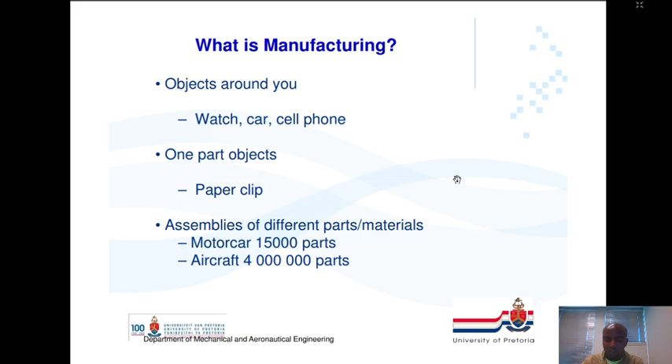In the beginning of manufacturing processes, at least structured manufacturing processes, you can think of the time before Industrial Revolution 1. There were still manufacturing processes, and that is why we had to come up with a structured way. That's when we entered Industrial Revolution number 1. Now we are at number 4. You can read about that.

Every part made by various processes undergoes manufacturing processes. It's manufactured. Basically, we are converting raw materials into products. If you can have a higher level of manufacturing, the standard of living is going to improve.

Think of how we can travel around now. We are able to manufacture airplanes, and for that it's easier to travel. But in the past, you had to walk from here to Malelane, or from here to Cape Town, or from here to everywhere on land. We could not even go into the water and into oceans. Today we can travel across the oceans, through the oceans, or over the oceans.

But really, manufacturing is the backbone of a healthy economy, and a healthy economy is what keeps us alive. If you go and find the parts and puzzles of the economy, you're going to find that manufacturing plays a very huge role. Remember, manufacturing is not only from engineering, as I said. That's why engineers are needed, but you can also have a situation where you require other people, like artists.

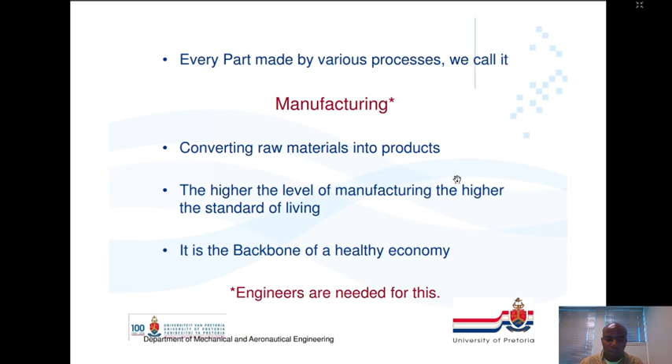Let's say you have to manufacture a plane, a finished product, a plane. You need it to have an interior designed, which you don't need engineers for, but you need artists. Each person contributing to a product will add a particular value to that product.

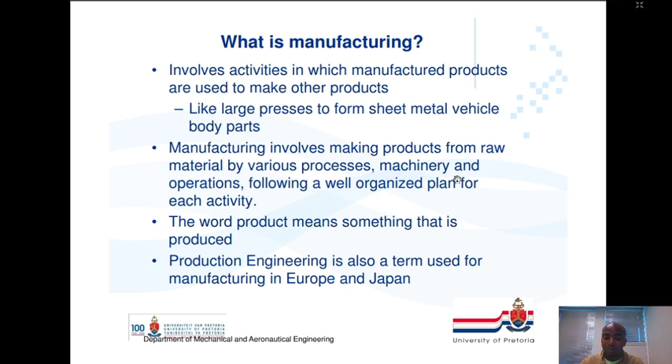Okay, let's move on. What is it? Like we said, you can have large manufacturing processes, you can have small manufacturing processes. The word product means something that is made or produced by some processes. And production engineering is often used in the region of Europe or Japan to refer to manufacturing.

Manufacturing is a complex activity. I just mentioned an artist coming to design an interior of a plane. Think of their requirements, and you need a whole lot of resources to work together so that they can produce products that are helpful. Think of it: support services, purchasing, process planning, shipping, product control, product design and development, marketing, sales, even manufacturing itself. You need resources, materials, capital, energy, and people. They form an ecosystem of manufacturing.

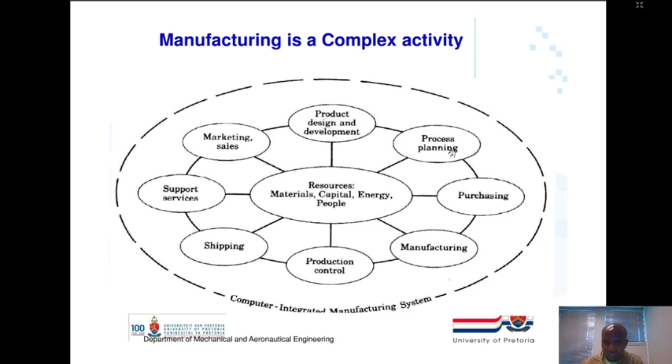Here you can see manufacturing must adhere to the following aspects. You need to have design parameters and you need to have specifications. What are the parameters and what are the specifications? If you need to jump 1 meter and want maybe a spring product that can help you achieve that, you need to indicate that this product needs to achieve a range, and if it's in meters, height, or length, you specify that. Those are specifications. And parameters: it must last for so many years, it must use this type of material. The design parameters and specifications actually talk about more or less the same thing.

It must be produced in the most economical manner. You don't want to be wasting time and wasting resources producing one thing. If you can produce this pen in 1 minute using 100 grams of material as the optimum, let it be like that. Don't find yourself in a position where you have this huge pen when you could have done it using less material. Time constraints are what we are constantly looking after.

Budget, you are constantly looking after that. That is project management. Quality must be built into a product. This pen, or this pencil, must last for quite some time, and for that you need to design things in such a way that they last. You don't want to have a pen that, I'm thinking of those pens I usually encountered at some point in my life, where the pen wouldn't write even if it's new. It is frustrating, so there's no quality there. You have a pen that you don't know if it's going to write or not. That type has no quality. But you can also see with the pricing on that pen that, okay, here we have a problem.

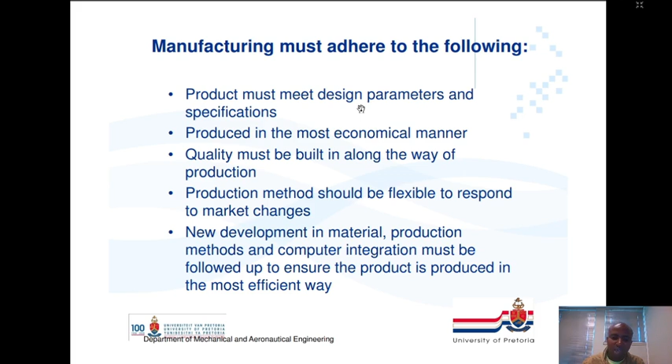New developments in material production methods and computer integration must be followed up to ensure the product is produced in the most efficient way. This links back to the economical way. Same thing.

Manufacturing organizations must constantly strive for high productivity. That is business now. Optimum use of all its resources. People should be on par, machines should be well maintained and running well. We need enough energy to produce; machines should be provided with energy, electricity, just as we need food. So when speaking about manufacturing, we've already touched on the agricultural space, where manufacturing also goes on. It plays a role everywhere there are products.

We should always look at the greater scheme of things. This brings in things like environment, the planet, safety. Politics gets involved here too - job creation, sustainability, having products that can be sustainable. When you manufacture, it's no use making a component that won't be purchased because you didn't look at the greater scheme of things - is the customer willing to pay for it? We'll cover a lot of these things later in the module.

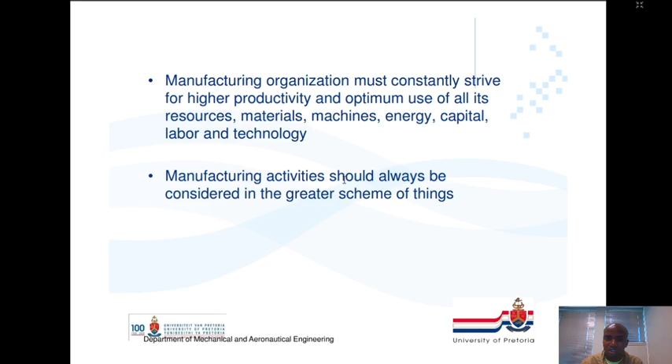Example: the paper clip. Think about it. Paper clip design - the material, should it be plastic or metal? You know which one to use depending on the application. How thick? What mechanical properties are we looking for - strength, stiffness, the shape? The shape also tells you if it will work. Think of a spring - initially it was just a wire, but once you put coils into it, it performs a different function. That's where shape comes in.

Think of a plate - this page here, laminated or something. If it's flat and you pour water on it, it will go everywhere it wants to. But once you shape it, you can pour water here and direct it in this direction - pour water here and get it over there. That's transportation, that's piping.

Another way of thinking about it - transportation of fluid, just an example since I want to stay general. Surface finishing - depending on whether you need a smooth or rough surface. Think of a tar road, what you need there depending on the application. Think of a piston - it has to be very fine because with the cylinder and piston, you don't want leakage from roughness. Some things need fine surfaces, some need rough, depending on application.

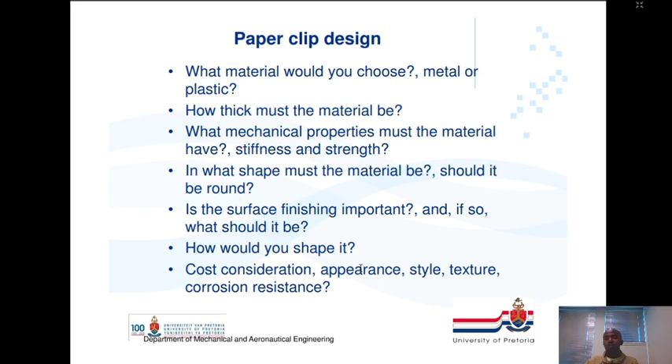Shape - we spoke about it, and the method of shaping it. What shape is it and what method? Cost consideration, we just spoke about it. Style, texture, corrosion resistance - those types of things.

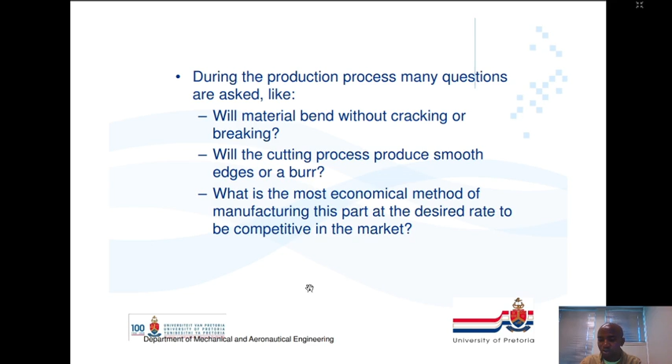During the production process, many questions are asked - these are not the only ones. Will the material bend without cracking? These questions are from a mechanical point of view. Will the cutting process produce smooth edges or burrs? What economical methods can we use? Who's going to buy this? How long will it work? Can we dispose of it safely? What is the impact on the environment? How safe is it going to be? How sustainable, maintenance-wise? Those types of things.

Another example, transistor. Here we are speaking about small things, very small things, microns. We are speaking about the thickness, less than the thickness of a pencil, and you still need to be able to touch on those. So there are processes already. We are at the microscopic level here, electrons.

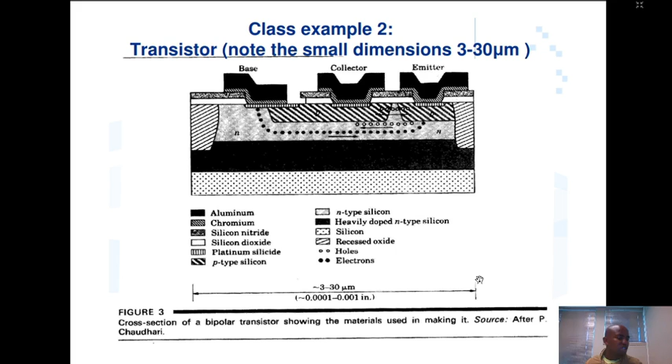Of course, the other requirement why phones are decreasing in size is because we want to carry them around, and at some point we had to have them all stationary like this one, because we did not have technology. They were supposed to be connected to function, but now we have phones that can work without connecting them to a physical wire. That's good.

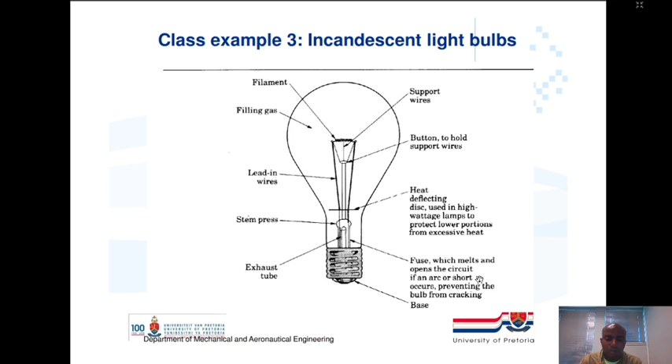A bulb, we all know bulbs. A lot of processes have gone through that. So products like this, you don't think about them in such greater detail, but they are actually products formed from manufacturing processes. That is the process, how you would go around it. There's automation of how this is going to be achieved. In the past, probably we first had to use our hands to connect them. Currently, probably you don't even touch the machine which produces this. You only touch the light.

And thinking about it now, you might be in a space, or we might actually soon be in a space where this product we will only touch when we have to install it in our homes, or when we take it from the delivery guy, or it might be delivered by a car or a robot or a drone. Those are the processes. They make our life easier, and then we touch it when we install it. If you are lucky and you designed a robot in your house to help you with a few things, you will maybe have a robot that will install it for you.

If it can be produced from, let's say, the material used here was mined, we might be in a situation where the products are mined and then undergo a process, and then we deliver them to a factory where some of the components are produced, and then we put it on an assembly belt, all automation, and then the next thing we package it automated, transport it automated, and install it automated, something like that. When we dispose it, we could get to a point in life where we don't even have to touch it after disposing. And recycling processes.

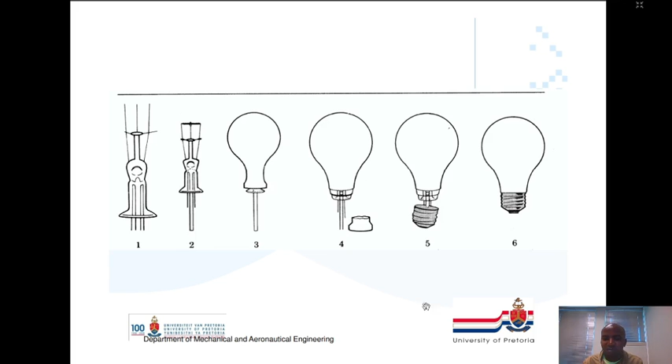So there we will speak about safety of the design, safety factor. So you design something thinking of the day in which it might encounter a bad case scenario. It must operate still.

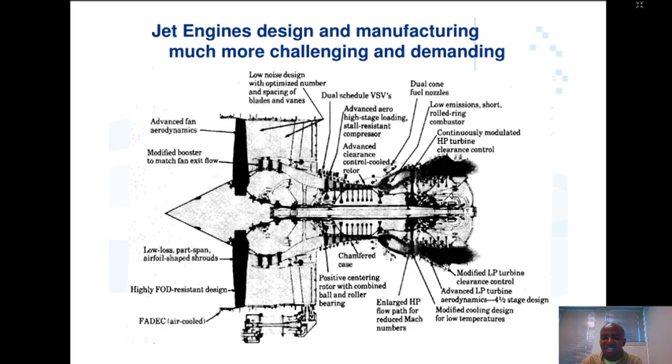Design for manufacturing. You need to have a design and manufacturing process which you can iterate. So it mustn't be a standalone type of thing. You must have a designing phase and a manufacturing phase, which you can check against each other.

But we are constantly doing this, if you realize, because initially you will have a car that can do 100 miles per hour, or 100 kilometers, let's use kilometers per hour, and after you touch there and here in the design, that car can now do 120, something like that. You should never separate the two, they should work together. Sometimes manufacturing engineers are called design engineers. So you must think about it along those lines.

You must meet the requirements. Imagine I say design for me a pen that can last for 2 weeks if I write every day, and then probably I tell you how much I write and that type of thing, and you give me something. The reason for that is because maybe I spend 2 weeks in a place where I'm far away from getting a new pen, and then you go design something that will last me a week. That's gonna frustrate me.

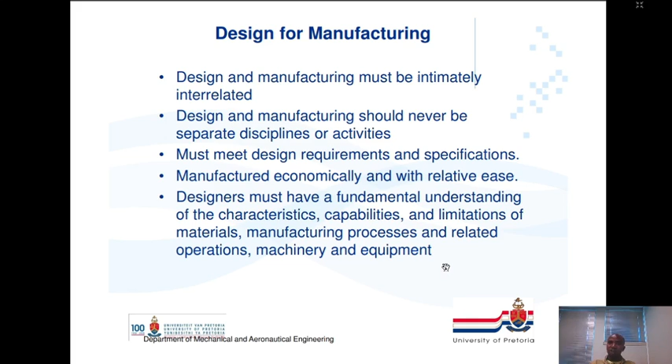Otherwise, if it's going to be used by somebody at your age, tell them that don't do this. If you do this, this is going to happen. And then you confirm that you received that information, then you go on. Basically, that is what we get in the industry. You will be told what to do and what not to do, and then you sign saying that I received this training and I'm going to do what I have to do and not do what I don't have to do. Okay.

The impact of engineering. Okay, some of the things I'm going to repeat here. Safety, assembly, production cost, and society, that type of thing. We don't want to design and build something that is going to affect our lives negatively in society. We are in South Africa. One of the things that we have is, I think it's a global problem actually, adapting to technology. Maybe if we do adapt to that, we might in a process have people losing jobs. As one of the things, the impact that you might have, you need to keep in mind creating jobs.

And there's a lot of things that we can talk about when we're saying impact of manufacturing, which we must keep in our heads when we do the designs.

Okay, now computer aided design, manufacturing, and process planning techniques are now powerful methods that we have, which we can use to help us in the manufacturing processes. Remember, we said this at the beginning: you need to be able to do rapid prototyping. If we have computers, we can visualize what we need, and then if we can go produce the exact same thing that is designed in the computer, we can have a prototype.

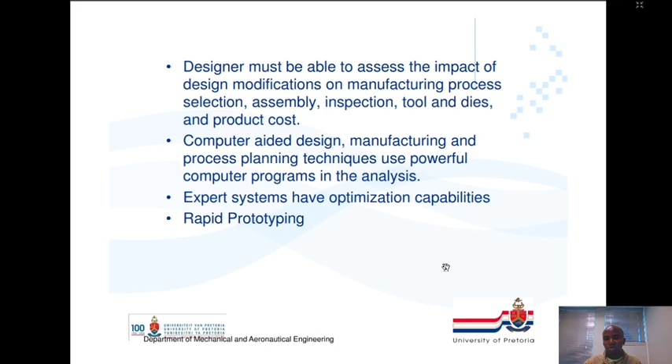Now, when we invented a measuring tape or measuring equipment, we started by having a stick as our measuring equipment. So we say this is a stick, we cut you the same length of stick to go manufacture with it. At least we were trying to get control. So, rapid prototyping.

The layout of a typical manufacturing process from the mechanical point of view: design process, selection of material, selection of manufacturing process, assembly line, product quality, automation, and the impact of computers. These are developments, and in the layout, of course, economics and manufacturing, organized for manufacturing. This layout is not step by step, so you might find that economics of manufacturing will take place somewhere in selection of material, because you want to select economically the materials you want to use based on the requirements.

Say you want something that will break after use, each time after you use it. Do you know that a fire extinguisher, if you break the seal, it's broken? So you need to break it so that you can use it. Otherwise, if it's sealed, it means it still has something. So that is the process and control over that. You need to break it and use it, and then we know it has been used, and then we refill it, or if it has some, we can reseal it or something like that.

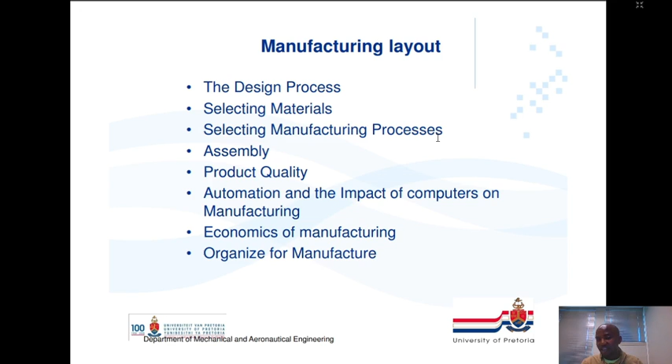You don't want to go and use a very expensive material for that, because you know that part of it is to break it for use. Somewhere else you don't want things to break, therefore you will not go and use a cheap, low strength material.

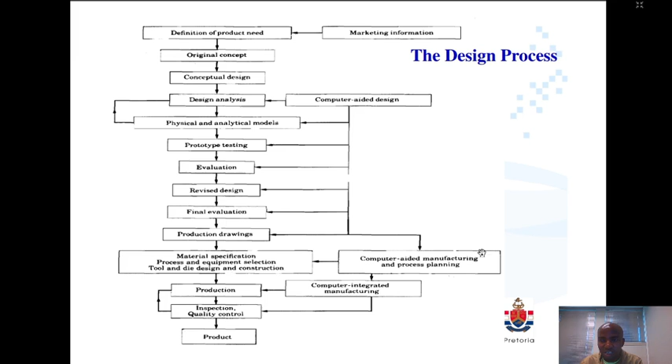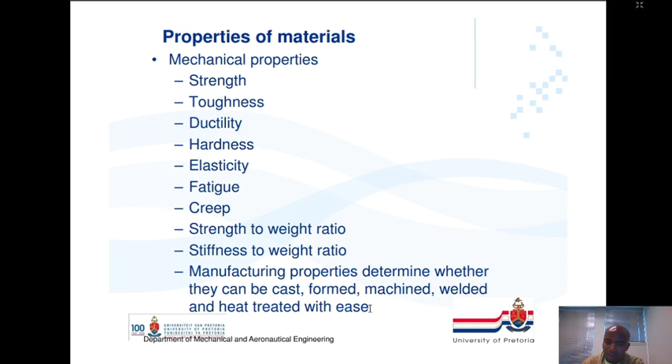Properties of material don't end here, they keep coming as we actually go into understanding material better. You have strength, toughness, ductility, hardness, elasticity, fatigue, creep, strength to weight ratio, stiffness to weight ratio. Material properties determine whether the manufacturing process can be cast, formed, machined, welded, or heat treated. I will teach you a lot about this in this module, so just keep that in mind.

Casting - we have the expendable mold and permanent mold. Don't worry too much about it, I'll go into details with that. Forming and shaping - we will cover machining, joining, and finishing operations.

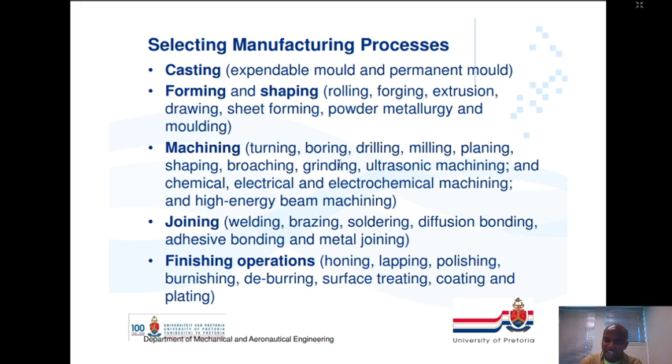And because it's from a mechanical point of view, just understand that I will be giving examples from a mechanical point of view. Dimensions and surface finishing - I spoke about this a lot.

Operational and cost consideration is very important. If this thing can be maintained - imagine having a car that you cannot maintain. Once it's broken, it's broken. You cannot substitute the parts, stuff like that. So you might spend a lot on cars each year after you have a breakdown. So you want to have simple things like tires. We know they get messed up very quick depending on how you drive, but you can replace those.

And then as part of manufacturing, you need to standardize things so that you can interchange them. This is why, when I was giving an example about measuring equipment, we started using sticks, then we invented measuring tools like that. Availability of machines - you need to know if you can manufacture this with which machines, where can I get those machines, number of parts to be produced. You need cost consideration. If you can automate your process, it's fine.

Tools and dies are very expensive. Sorry about me jumping up and down, but you need to consider these components. Be considerate about cost and operation.

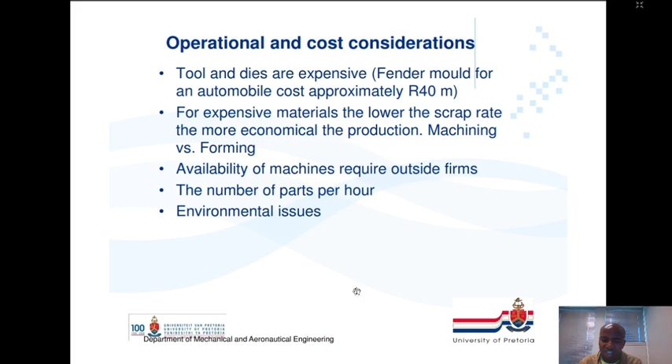When you design, you must design for assembly. Imagine you have a car that you don't assemble—it's complete like that. You don't want to need to break it down by cutting it with a grinder or something; that's not an ideal way of manufacturing. You manufacture and design for assembly so that you can break out parts, bring plastic and attach it to metal somehow, and attach electronics to mechanical components, that type of thing.

So put that: permit assembly with relative ease, and the possibility of designing multi-purpose parts. If you can interchange parts, it will be very nice.

Imagine each car model has a tire, but that tire can only be used on that particular car—it's not really nice. You want to be in a position where, if it's an identical model, design and everything, you can interchange some parts.

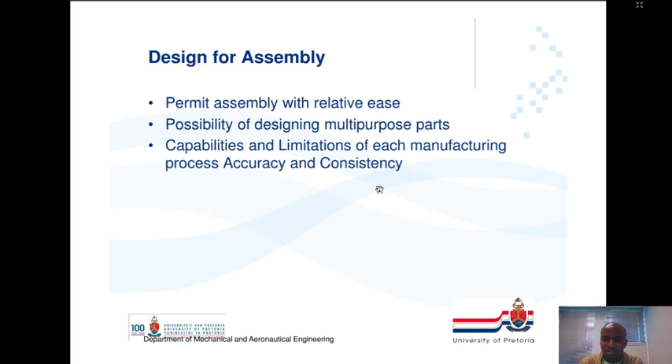Capabilities and limitations of each manufacturing process, accuracy and consistency—that is also going to be very important. We are going to touch on that. Assembly, look at this.

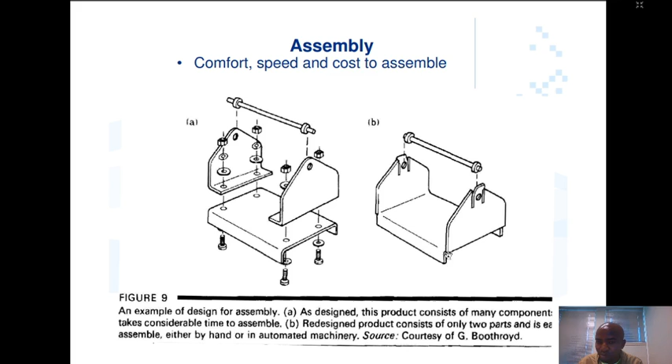We initially had this using number A. We can achieve the same thing using number B, but these are different manufacturing procedures. If you don't have a procedure that can achieve this at a go, and you have a procedure that can do this instead, then you are forced to follow this method, and this can be a little bit expensive depending on the cost of each component. Even here it could be a little bit expensive, because maybe the machine that you use to form this is expensive.

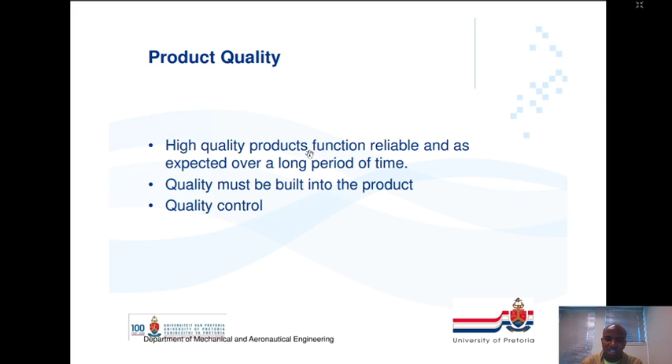Product quality. Quality has something to do with how satisfied you are after using something. High quality products function reliably as expected over a long period of time. Quality must be built into a product—we spoke about this. Quality control is very important.

Automation and the impact of computers on manufacturing—this is something we cannot avoid today. Major goals: integrate various operations to improve productivity. Remember, computers don't make silly mistakes; 1 + 1 cannot change, and they can do that repeatedly over a million times within a short period, counting from 1 to a million.

Think of those machines used to count how many notes you have. They probably even take information—the machine goes through and is able to detect even the numbers on the notes. It's able to count how many notes there are and which note corresponds to which number, so it can record the numbers and the count. Think of that process—it's quick, happening within a minute or so.

Minimize cycle time, reduce labor costs—basically, if we could get to a point where this is achieved, we would all be happy. But this is where politics come into the picture, because you need to think about the social impact of that.

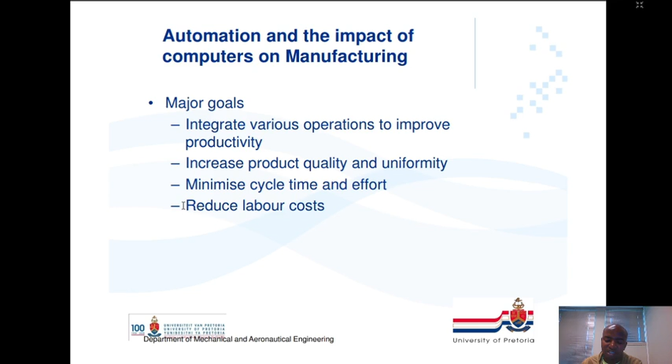Usually you'd find me looking at the pen like this, checking if it has a defect, taking a minute to check, and that depends on how I feel, by the way. But once you have computers in the process, they take less time and don't feel anything. You preset them so that if they see a dent, that product is a failure and gets kicked out of the assembly line. With me, depending on whether I'm angry or happy, I look at the product, see a small dent or a big dent, or something right on the edge of the criteria, and I get confused. When I'm happy, I just let it through, that type of thing.

But remember the social impact—that's why manufacturing becomes very complex when dealing with it.